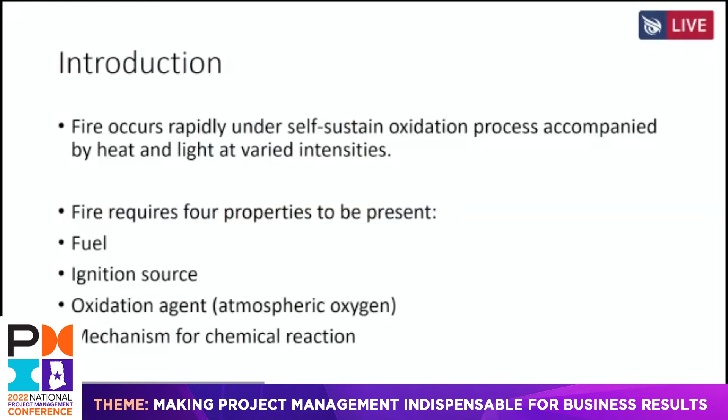And fire presents itself in three basic classes. We have fires that come from wood and paper sources. We have fires that come from gas or petroleum products. And then the third class comes from electrical equipment, electrical installations, or electrical sources generally. So in effect, when you have assets such as archives and office furniture, fire that may arise out of them can be classified as class A. And then we have lubes, storage, gas, petroleum tanks, and so on, that are considered class B.

And then we have our powerhouses, which technically we call switchgear, or air conditioners. That's very dangerous equipment that can raze our properties down easily. Data centers. As we talk about technology, we talk about data warehousing systems. All these can be great sources of fires that can raze our commercial or industrial assets down, and they are considered class C.

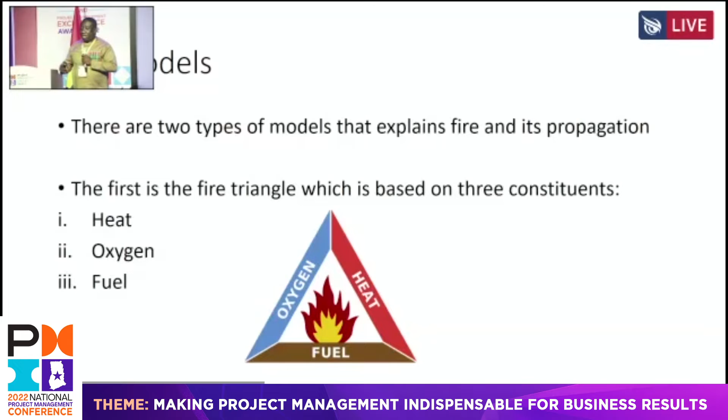Fire engineering is built on two basic models. We have the triangle model and we have the tetrahedron model. The triangle model says that you need heat, you need oxygen, you need fuel to connect for fire to propagate. And when you take any one out of it, the fire will die down. That's the first principle. And the second principle says that you need heat, oxygen, fuel, and a fourth component called chain reaction. That's the chemical property of the fire.

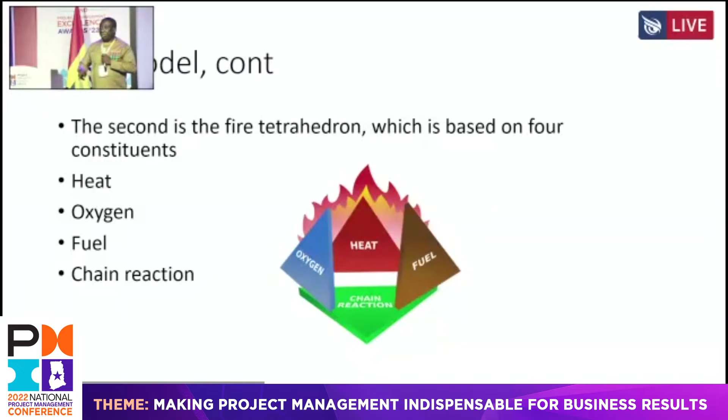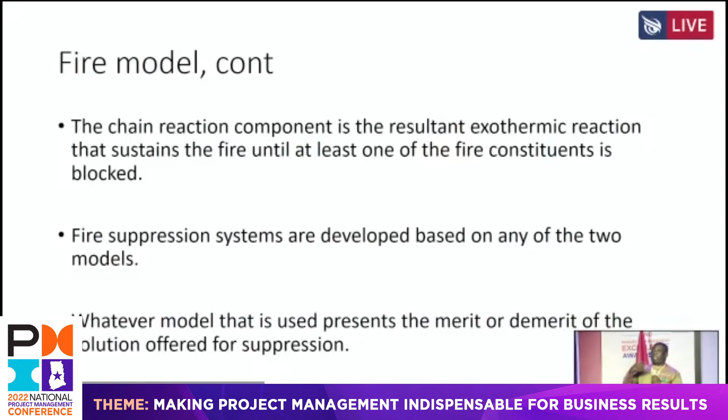And these two models present different technologies for containing fire. So we have suppression technologies based on the triangle model, and technologies based on the tetrahedron model. And each technology comes with its own merits and demerits. For instance, we all know of foam and water as good suppressants of fire. When you apply foam, it covers the surface of the fire so that the fire will not get access to oxygen to propagate.

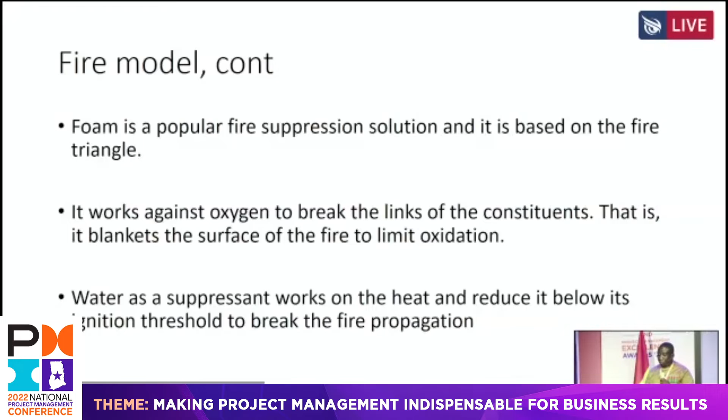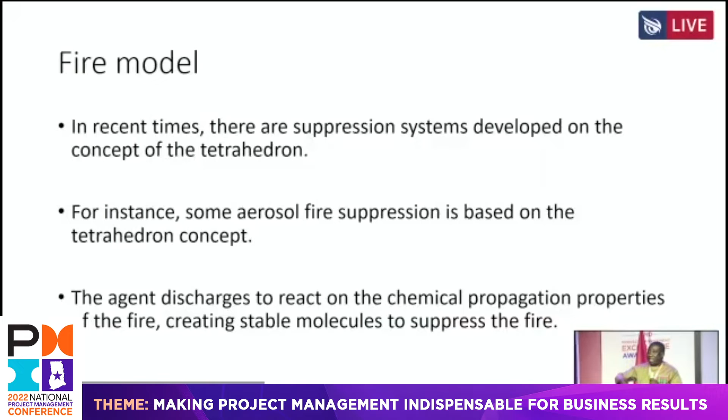Similarly, when you pour water as a suppressant on fire, it works on the heat component and reduces the heat below the level that can cause ignition, and the fire will be suppressed. In recent times, there are also new technologies that act on the chemical reaction that propagates the fire. So it works on the second model, the fire tetrahedron concept. It doesn't work on the heat, the oxygen, or the fuel source, but it causes instability in the reactions that propagate the fire until it is suppressed.

One strength of the tetrahedron model is that usually it is able to operate such that it can guarantee human occupancy under suppression. What I mean is that if it is working on the chemical reaction component, it is not taking oxygen from the room, so when the agent discharges and human beings are there, it will not cause any damage to their health.

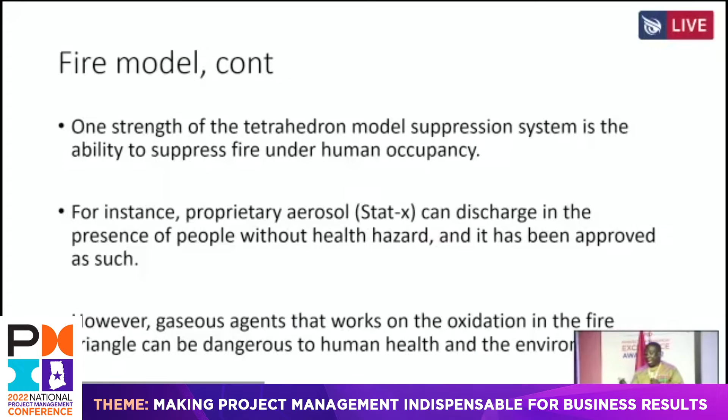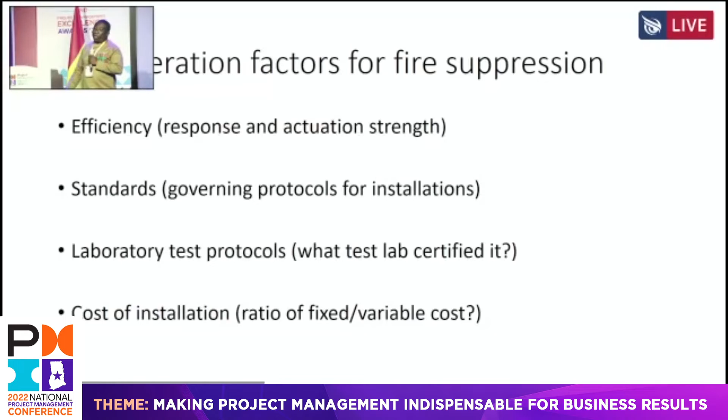So we have some aerosol suppressions. A good one is Stat-X. That more or less is based on this. And then also, some halon gases are based on the tetrahedron. Now, what factors do we consider if we want to have efficient fire suppression to protect our organization's assets?

Usually, the conversation is around budget. But there are more issues than the budget, because fire is such that when you install it, it's very difficult to do away with it. So if you don't consider some key factors and you only focus on the budget, you may spend that money and see that you don't have value for the money spent on the project. So we look at efficiency.

How does the solution you are buying respond to actuation? Actuation means discharge. In case there is fire, how long does it take for the system to respond to the fire? Sometimes you may buy a fire suppression system, there can be fire, and it will not respond. So it's one critical thing you need to look at.

And then the standards. What protocols govern the installations? Fire is a big engineering system, but in our part of the world, we don't see it like that. Fire engineering is a specialty of engineering, so it follows certain protocols. For instance, if you are buying from the United States, then you know that it's going to follow the National Fire Protection Association protocol of the United States. If it's in the EU or wherever it is, it also follows their protocol.

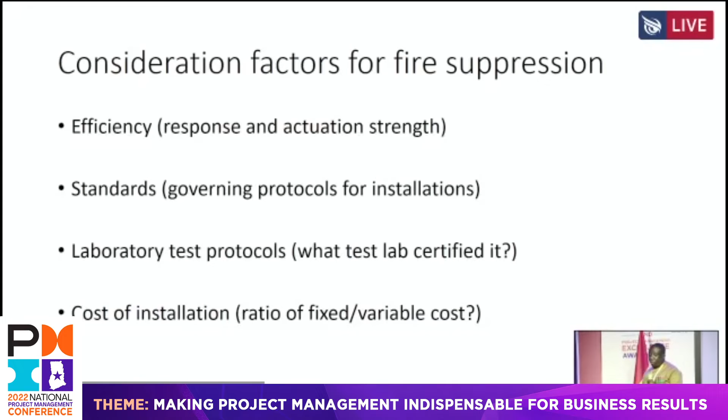And then the health implications of fire suppression. Some of the agents are very hazardous to health, especially if they contain HFCs. So when they discharge, there shouldn't be human beings around. So you need to be very particular about that. And these days, as we talk about environmental sustainability, there's a global conversation around doing away with HFC-based fire suppression systems.

Cleanness. When the substance discharges, does it require you to come and clean after the discharge? Or after discharge, does it not leave any residue? It's a very key thing that you also need to consider before you invest in fire suppression. And the last one, obviously, becomes our budget. Will you have value for money? Because when you invest in fire, it will take you 10 to 15 years.

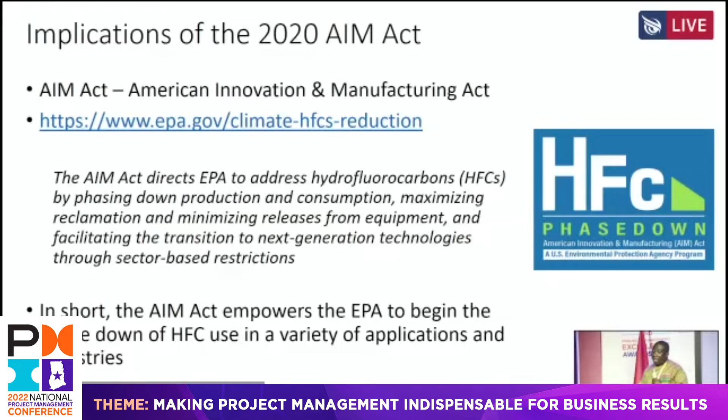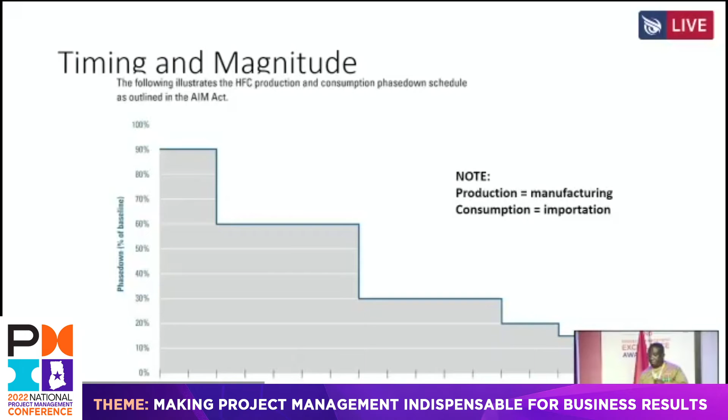As I said earlier, there are conversations going on around some of the agents used to develop fire suppression systems, especially the HFCs. So in America, for instance, they are trying their best to cut down on those solutions. So by 2030, 2040, HFC-based products will be phased out. So as the years go by, they are becoming expensive because there is a check on their use. Okay.

So what are some of the technical requirements we need to look out for to judge the budget that we are spending on fire? There is no cheap fire suppression anywhere. Fire suppression is always on average 5 to 10% of the asset value of what you want to protect. There is nothing cheap. So when you invest in cheap solutions, sometimes you may throw your money away, because fire is a complex engineering solution.

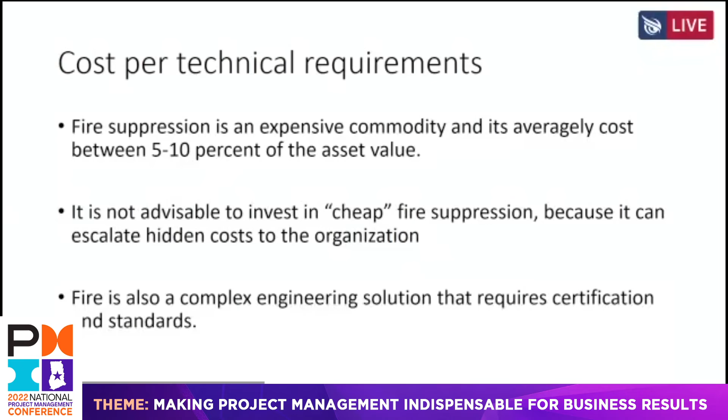Sometimes we have people who will install a fire detection system for us, and they may install it the way an artisan will fix some here, some there. No, that's not how it is done. It should follow a very strict standard. So when you are investing in the solutions, first, you need to ask for engineering certification of the provider. Find out whether the provider has an engineering certificate.

Two, as we said earlier, the technical standards governing the installation. Those of us who belong to the NFPA use the NFPA standard. And three, a lot of people don't do this: you need to also ask for what we call manufacturer's authorization. As far as we don't manufacture a lot of the products here, we need to get the manufacturer's authorization through the vendor.

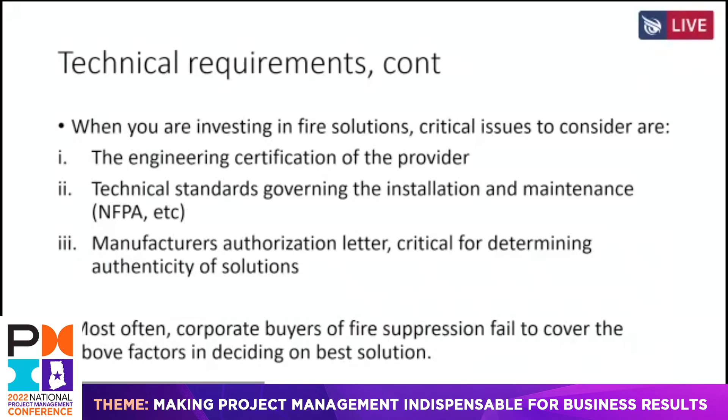As we are here in Ghana, the major products that we have in our market usually are the fire extinguishers. They come in either dry chemical or CO2, some are foam, some are water. We have halon gases for automatic systems. That's what we popularly call FM200.

And what are the challenges the fire industry is facing here? One major challenge is we don't have a good relationship among the stakeholders. In advanced systems, you install fire suppression to minimize your insurance expense. But in Ghana, we don't have that strong relationship. So it's as if you are spending your money on fire, the insurance man will also come for his or her part of it, and so on and so forth. So that collaboration is weak.

And also with construction. Mostly with the construction budget, sometimes the edifice will be put up. When we are investing in or spending on concrete, or spending on blocks, iron rods, ceiling, electrical materials, they are core parts of it, so we don't feel it. But the moment fire comes into the story, then all of us will go back and budget. We don't have money for it.